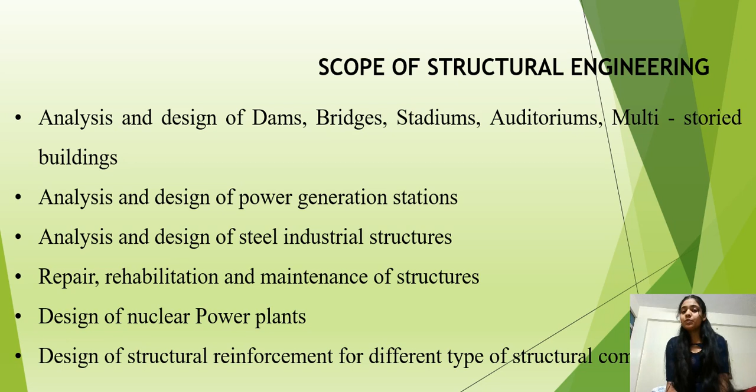First is the scope of structural engineering. This covers analysis and design of dams, bridges, stadiums, auditoriums, multi-storied buildings, power generation stations, and steel industrial structures, repair, rehabilitation and maintenance of structures, design of nuclear power plants, and design of structural reinforcement for different types of structural components. These are the characteristics, or scopes, of structural engineering.

Next, scope of geotechnical engineering. This includes assessing the quality and strength of soil or rock to construct civil engineering structures, designing retaining walls for soil retention, deciding the type of foundations for different types of structures, designing underground structures such as tunnels and conduits, designing earthen dams for water storage, and designing roads for transportation facilities. These are some scopes of geotechnical engineering.

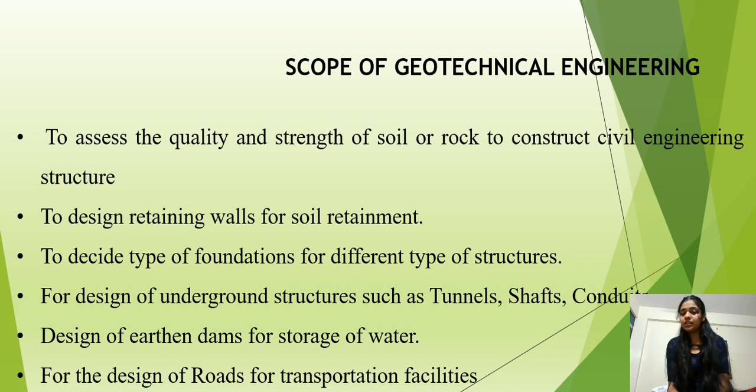Next, scope of construction technology. Construction technology involves planning for construction equipment and machinery for construction projects. It deals with planning, scheduling, and execution of construction activity related to a project, and comprises man, material, time, and money management. Emphasis is on new construction practices such as precast and pre-stressed construction, safety of men and material, and utilization of marginal material, as well as construction of underground tunnels using modern equipment and construction of floating structures. These are part of construction technology.

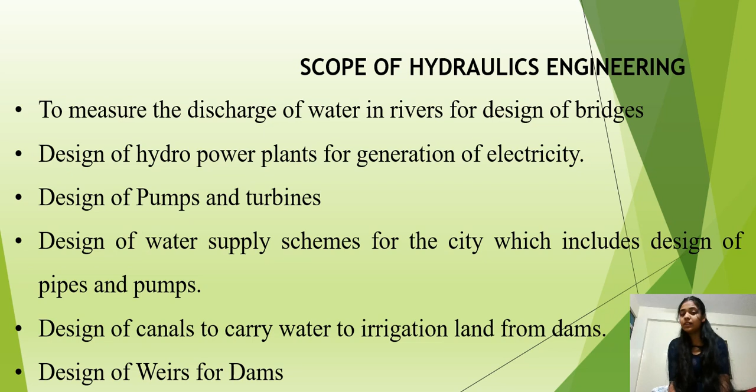Next is the scope of hydraulics engineering. Hydraulics is used to measure the discharge of water in rivers for the design of bridges, design of pumps and turbines, design of hydropower plants for generation of electricity, and design of water supply schemes for the city, which includes design of pipes and pumps. It also includes design of canals to carry water to irrigation land from dams, and design of weirs for dams. These are uses we see in daily life, and are some of the scopes of hydraulics engineering.

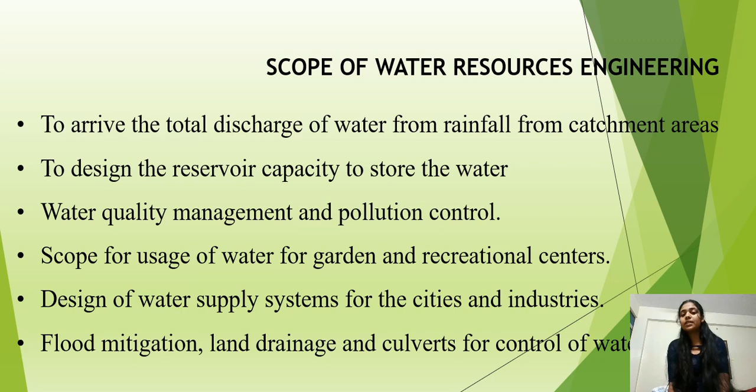Next, scope of water resource engineering. This includes arriving at the total discharge of water from rainfall in catchment areas, designing reservoir capacity to store water, water quality management and pollution control, scope for usage of water for gardens and recreational centers, design of water supply systems for cities and industries, flood mitigation, land drainage, and control of water. These are some uses we are using.

Scope of irrigation engineering includes assessing the quality and strength of soil or rock to construct engineering structures, understanding the system of irrigation and command area development to supply water to irrigation land to grow crops as per requirement, improving groundwater storage of land, increasing food production by supplying optimum quantity water to crops through irrigation, providing additional revenue to the nation in the form of water tax and increased yield, and cultivation of commercial crops such as sugarcane and cotton.

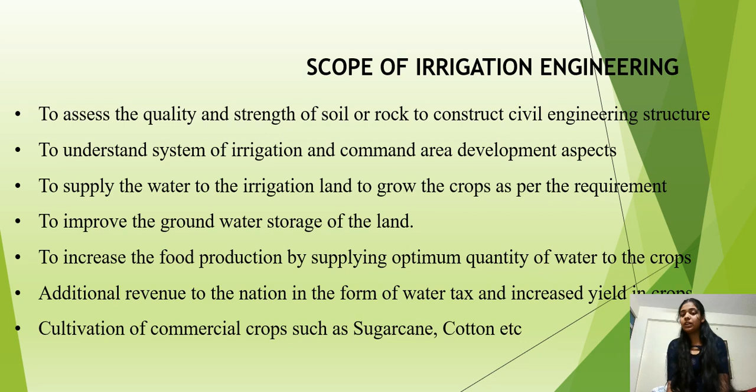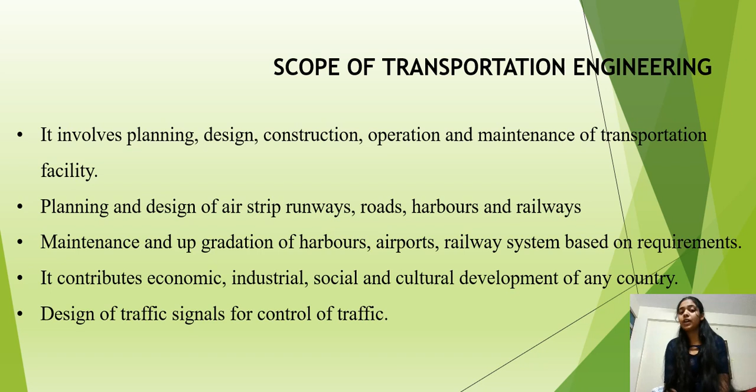Next, we go through the scope of transportation engineering. Transportation engineering involves planning, designing, construction, operation, and maintenance of transportation facilities, including planning and designing of airstrips, runways, roads, harbors, and railways, and maintenance and upgradation of harbors, airports, and railway systems based on requirements. It contributes to economical, industrial, social, and cultural development of countries, and includes design of traffic signals for the control of traffic. This is transportation engineering.

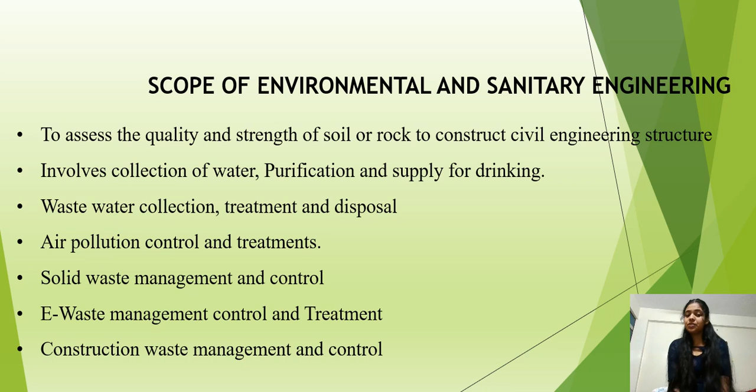Next, scope of environmental and sanitary engineering involves assessing the quality and strength of soil or rock to construct civil engineering structures. It involves collection of water, purification and supply for drinking, wastewater collection, treatment and disposal, air pollution control and treatment, solid waste management and control, e-waste management and treatment, and construction waste management and control.

Next, we go through the scope of geographic information system, which we shortly call GIS.

It is a computer-based information system that performs the activities of capturing, storing, manipulating, analyzing, and displaying both spatial and non-spatial data in order to solve complex research, planning, and management problems.

These are the following uses of GIS. Shall we go through them one by one? That is telecom and network services, accident analysis and hotspot analysis, urban planning, transportation planning, determining land use or land cover changes, navigation which is routing and scheduling, flood damage estimation, and natural resource management.

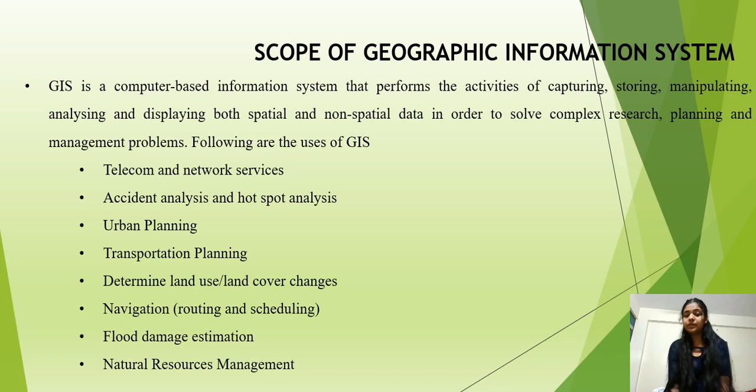Next, scope of earthquake engineering. An earthquake is nothing but a sudden slipping or movement of a portion of the earth, caused by the sudden release of stresses.

Next, the study of behavior of buildings and structures subject to seismic loading. Forecast of the potential consequences of strong earthquakes on urban areas and civil infrastructure. Design, construct, and maintain structures to perform at earthquake exposure.

It also assists in analyzing the interaction between civil infrastructure and the ground, including the consequence of earthquakes on structures. Next, the design of seismic control devices to minimize the seismic effects on buildings and infrastructure.

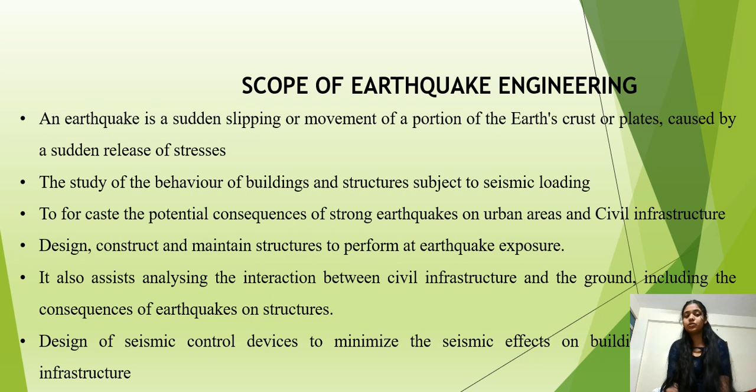Next, we have discussed the scopes of civil engineering. There are many types of scopes of civil engineering. Next we shall go through building materials. In civil engineering, mainly for the purpose of constructing buildings, some materials are used.

First we go through stone. Stone is a major part of building material. Stone is nothing but a piece of rock that is used in construction, that is called stone.

These are several uses of stones. Stones are used for the base preparation of different constructions. Also, they are important for general building works like foundations, floors, covering, masonry works, etc. Stones are used for ornamental and architectural beauty of different types of structures.

Stones are used for making fireproof structures. Stones are used as construction materials of different structures such as columns, bridges, piers, harbors, etc.

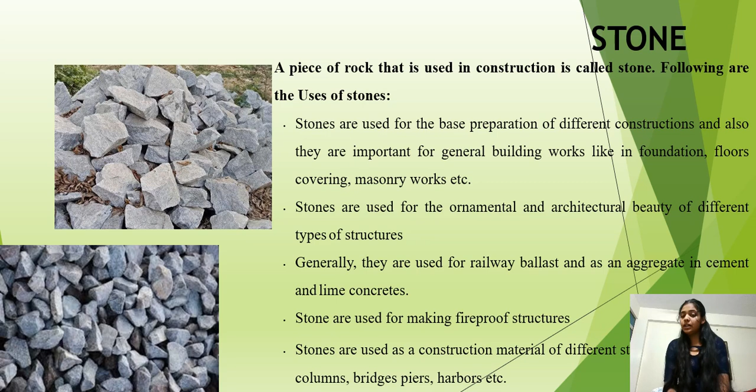Next is one of the materials, that is brick. Brick is nothing but a small rectangular block, typically made of fired or sun-dried clay. These are used in construction.

As in the first, there are three classes of bricks: first class, second class, and third class bricks, which we use for the purpose of building construction. The first class brick is also used for the architectural effect on structures.

Second class bricks are used in construction, but the surface should be plastered evenly because of the irregular size and shape of the bricks. Third class brick is used for temporary structures. Broken bricks are used as aggregate for foundation concrete and road metal works.

This is the standard size of bricks, let's go through this.

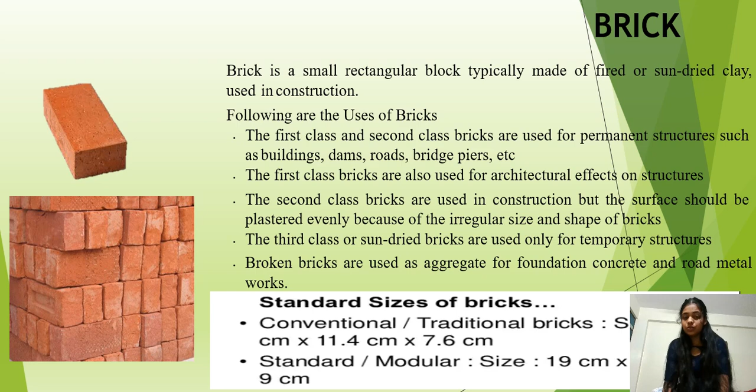Next, wood. Wood is a material which forms the trunks and branches of trees. These are several uses of wood. Wood is also best for making furniture.

Next, artwork such as statues, carving, and making decorative objects. For this purpose, we are using wood.

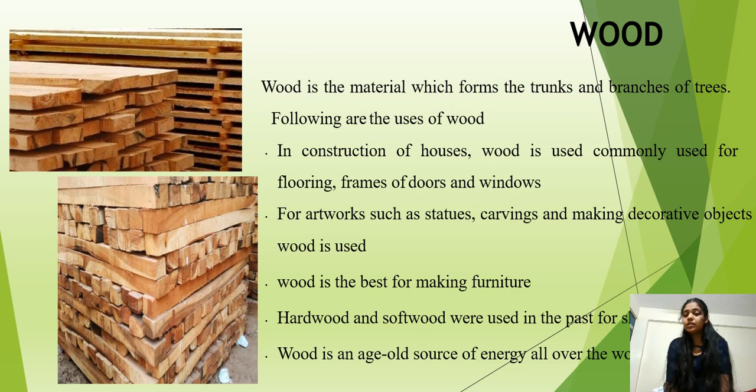Next, glass. Glass is also a hard, brittle substance, typically transparent, made by fusing sand with soda and lime and cooling rapidly. These are some uses of glass where we use it in the construction of buildings.

Glass wall cladding provides a sleek and easily maintained wall surface and also increases the aesthetic view of the structure. Glass is 100% recyclable. It does not degrade during the recycling process. This is also one of the advantages of glass.

Next, it is also most typically used as transparent glazing material in buildings, including windows in external walls.

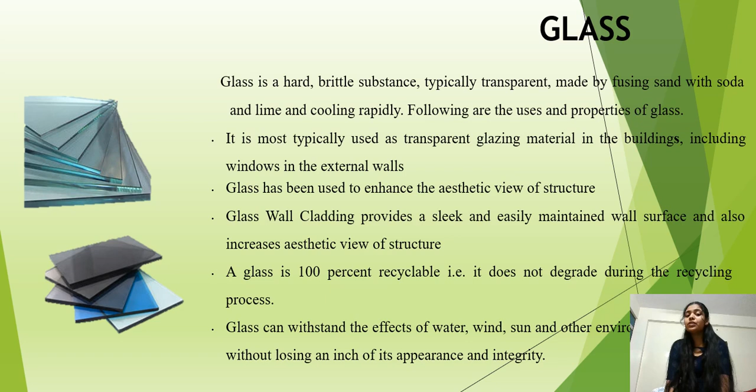Next, we are using aluminium. It is a chemical substance or an element, a light silver colored metal used especially for construction and aircraft parts.

These are the following uses of aluminium, shall we go through them one by one? Aluminum sections are used for the construction of high-rise buildings due to its high strength to weight ratio. Aluminum frames are generally durable, cost-effective, and are used for partitions and window frames in buildings.

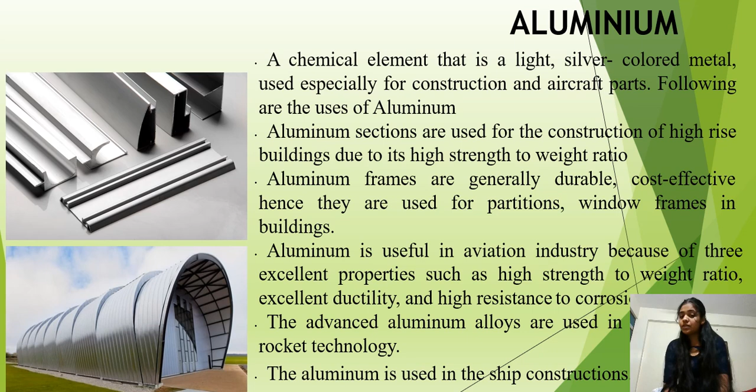Aluminum is useful in aviation industries because of three excellent properties: high strength-to-weight ratio, excellent ductility, and high resistance to corrosion.

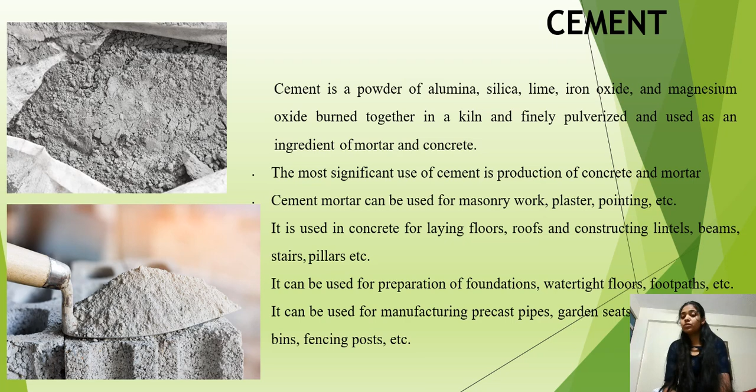Cement is a powder of alumina, silica, lime, iron oxide, and magnesium oxide burned together in a kiln and finely pulverized and used as an ingredient of mortar and concrete. The most significant uses of cement are production of concrete and mortar. Cement mortar can be used for masonry work, plaster, pointing, etc. It is also used in concrete for laying floors, roofs, and constructing lintels, beams, stairs, pillars, etc.

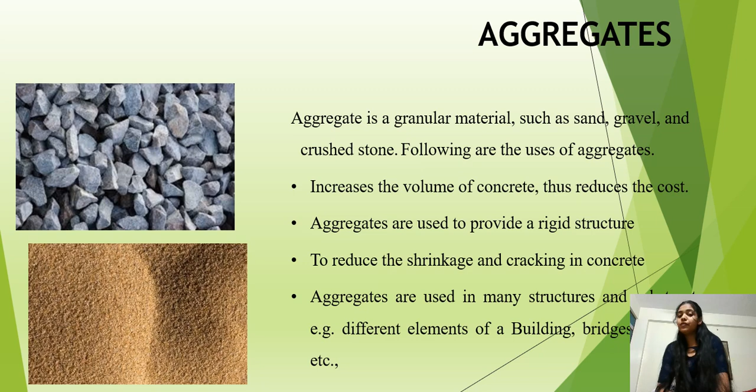Aggregates are granular material such as sand, gravel, crushed stone. These are the uses of aggregates: aggregates increase the volume of concrete, thus reducing the cost. It also reduces the shrinkage and cracking in concrete. Aggregates are used in many structural elements of buildings or bridges, etc.

Concrete is a constructional material composed of cement, fine aggregates, and coarse aggregates mixed with water, which hardens with time. These are the uses of concrete.

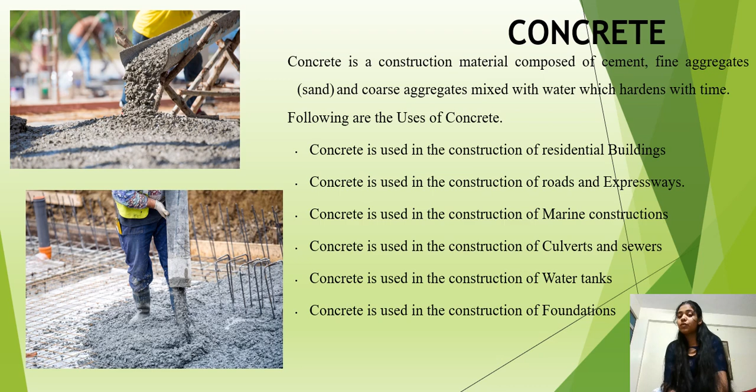Concrete is used in the construction of residential buildings. Concrete is also used in the construction of roads and expressways. Concrete is also used in marine construction. Concrete is also used in the construction of culverts and sewers. Concrete is used in the construction of water tanks and also in the construction of foundations.

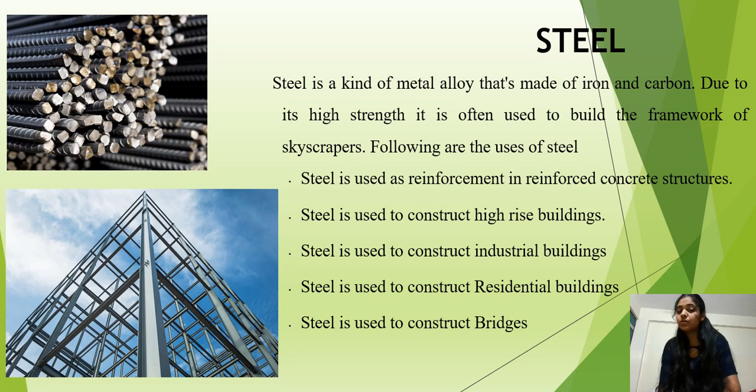Steel is also one kind of alloy made up of iron and carbon. Due to its high strength, it is often used to build the framework of skyscrapers. It is also used in the construction of high-rise buildings, and in industrial buildings such as bridges, as well as residential buildings.

Next, we are going through RCC, that is nothing but reinforced cement concrete. This is the reinforcement shown in this image. Reinforced cement concrete is a composite building material consisting of concrete reinforced with steel.

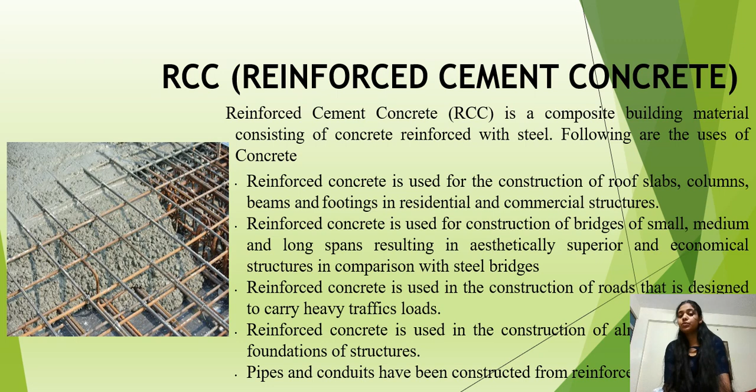These are some uses of reinforced concrete. It is used in the construction of roads that is designed to carry heavy traffic loads.

Next, PSC is nothing but pre-stressed concrete. Pre-stressed concrete is a structural material that allows for predetermined engineering stresses to be placed in members to counteract the stress that occurs when they are subject to loading.

These are the uses of PSC. Pre-stressed concrete is used in the construction of superstructures of bridges, and also in the construction of runways and water tanks, etc.

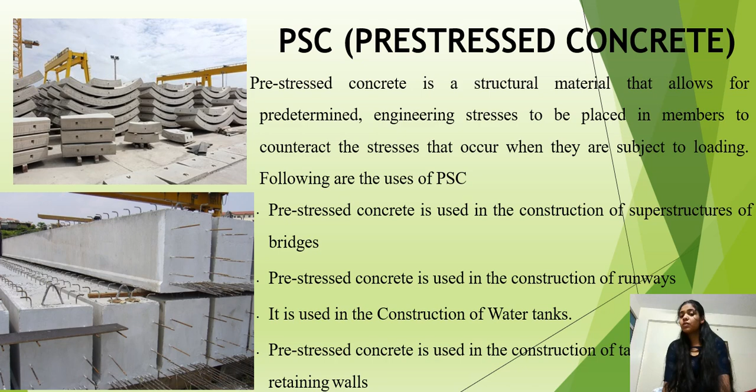Next, smart materials. What are smart materials? Smart materials have different properties that can be changed according to changes in external factors such as temperature, light, stress, moisture, etc. These are the following benefits of smart materials.

Smart concrete technology offers an alternative method for monitoring the health of reinforced concrete structures. Crystalline waterproofing of concrete increases the efficiency of curing. It also increases concrete durability and increases the lifetime of concrete by reducing the corrosion of steel.

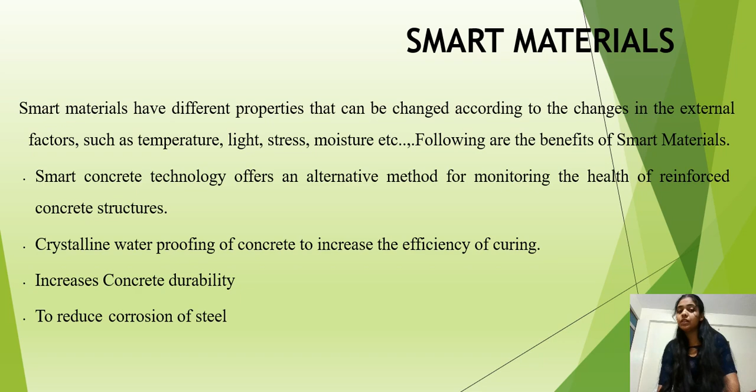Next, the role of the civil engineer in the development of a nation. Civil engineering has a very important role in the development of infrastructure like new townships, building structures for rural and urban areas for various utilities, construction of reservoirs, canals and distributaries to take water to agricultural fields, and purifying and supplying water to areas like houses, schools, offices, etc.

The civil engineer must monitor land, water and air pollution and take measures to control them. He is also responsible for solid waste management and for well-planned and built networks of roads and road crossings, etc. This is what we are discussing in this class.

Today we are discussing the scopes of engineering, in that civil engineering. In that, what we discussed, some points after the building materials. These are some important topics in module one.